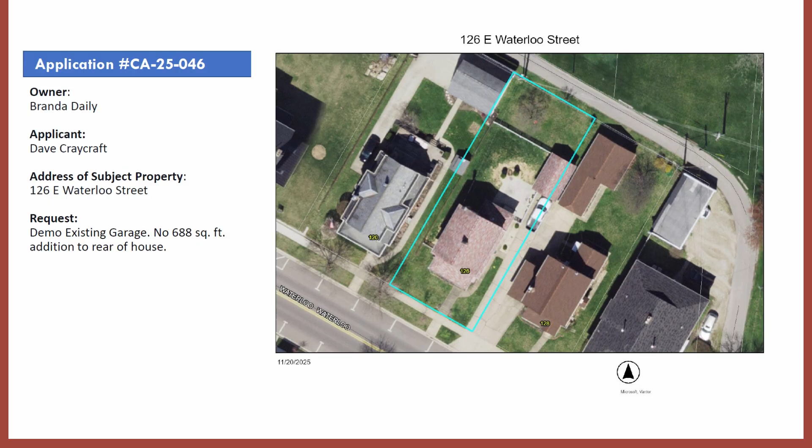What we're probably gonna do is cut like this over to here and replace all of this, and then this will be a pad too. Got it, okay, you can see how it's all broken up. Yeah, and she might decide to replace all the bad concrete drives. Could we see that overview with the concrete pad, please, Andrew?

What's the purpose of that concrete pad there? She just wanted someplace to put her picnic table and other things, like during the summertime, if you want outdoor patio space of sorts.

Is there any plans for any vegetation or buffering of that space from the rear that you know of, Dave? I don't know. I mean, she's talked about trees and things like that, so it will be slightly landscaped.

My only concern from our office was basically from the road all the way back to the last 24 feet of the lot was gonna be just a solid strip of concrete. I wasn't sure how this patio, if it was broken up, there was a gap, but just the way we were thinking about it, worst case scenario is someone could fit like 3 30-foot RVs on this driveway and still have room to park 2 cars, and those are things that we try to avoid.

Well, the new concrete won't extend back to the alley. No, but that's just thinking about how long and straight this is. Someone could just drive through the lawn, get back through the alley, and all of a sudden you have this really long runway. So I wasn't sure how this is broken up to define the patio, not the old driveway.

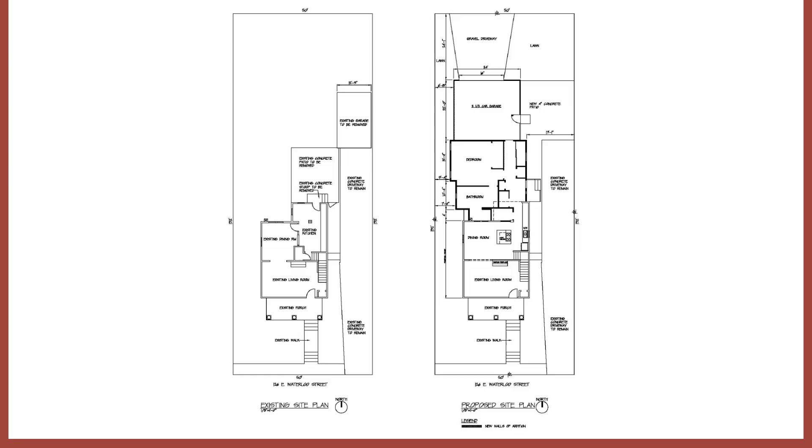But anyway, yeah, I kind of answered that question. Dave, what type of soffit, Hardie soffit details? What about ventilation? Well, the soffit will be vented. Using like a strip vent? No, I think it's just regular, it's got perforations in the Hardie soffit. Okay, yeah, I got you.

Gutters are to match existing. Yeah, the original house, the existing house is K-style. K-style. Yes, okay.

No other questions? I'd like to make a motion that we approve application CA-25-046, omitting the patio from tonight's application for a future application, that the roof is all to be replaced and all match with new dimensional asphalt shingles, and the driveway is not to be gravel but rather a paved material.

And we didn't talk about the siding on this. Are we in agreement that the shakes are the way to go with option B? Shakes are the way to go. Yes. And then also, we're going to add one window to each side, the east and west side of the garage. That the doors are to be fiberglass, two-panel, nine lights, to match the existing, and that the gutters will be K-style gutters to match the existing.

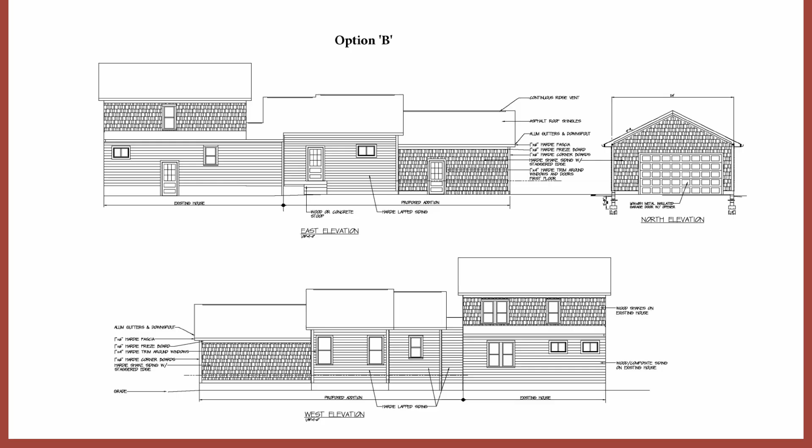The next application for tonight's agenda is CA 25049. This application was also tabled at last month's meeting. This applicant was requesting to demo the existing house to construct a new single-family house on the existing foundation.

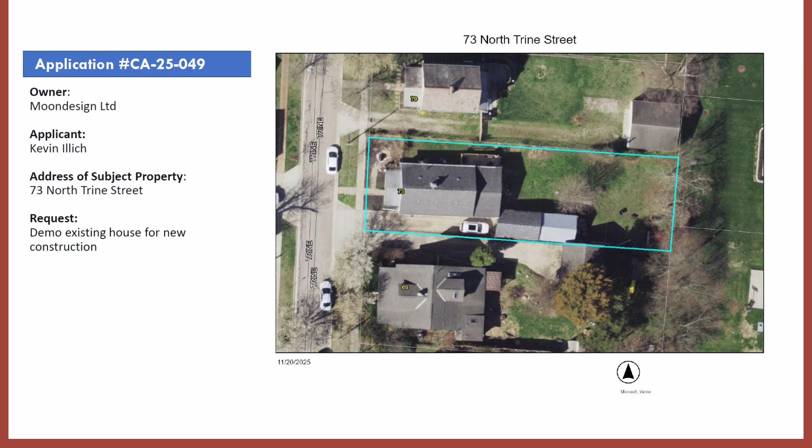Based on last month's landmarks meeting, the commission was invited to go take a look at the house to warrant if additional criteria, as noted in the demolition considerations, was required for the evaluation of demoing the existing home. I believe most, if not all of you, went to tour that house to see if this demolition consideration was deemed necessary.

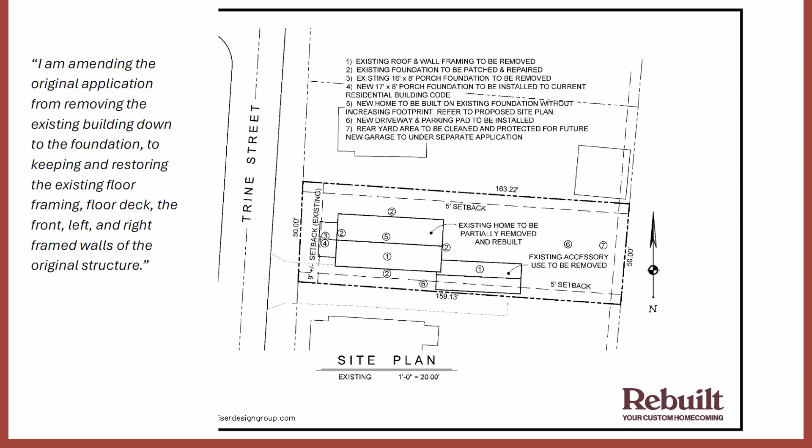The applicant, since your on-site visit, has amended their application to not demo the existing house to the foundation, but rather keep the existing floor framing, floor decking, and the front, left, and right framed walls of the original structure, while removing the rear wall, which is a portion of the addition that was added to the house in 2003, to rebuild with those existing walls and first floor frame deck and existing foundation for the new house that will be on the same footprint of the lot.

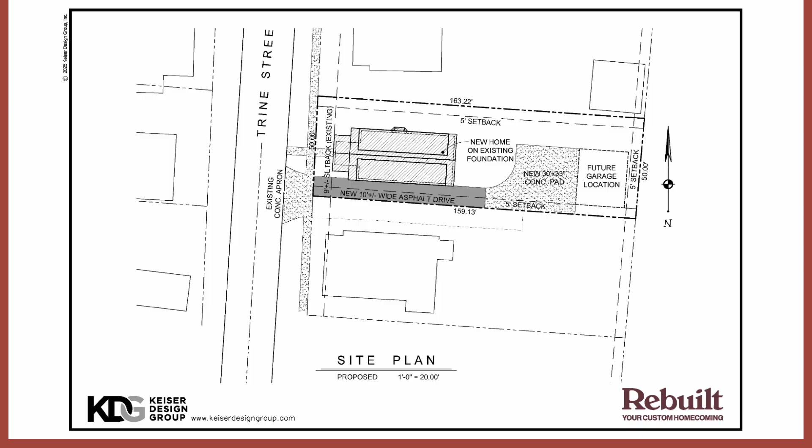So again, based off of last month's discussion, here's the updated site plan showing the new house on the existing foundation. We'll have a future application discussed next about the detached garage to be in the back. The floor plan has not changed since your last review, but when looking at the front elevation here, let's go over some of the changes with the commission.

As presented last month, this front porch patio was going to be historic architectural brick, a true brick with a concrete cap on it. The applicant has modified this item to be a brick veneer attached to a concrete slab for the porch. I believe that was the example that was brought to last month's meeting.

The window trim, the lower section of the windows, the sill has been updated since last month's review. The applicant has also updated the rendering a little bit to show some line work for the standing seam metal roof on the gable ends.

Moving on to the back, no changes other than the lower window trim. To the side, the only change that's notable on the two side elevations is the asphalt shingle has changed brands and type from the last review. And then looking at the south elevation here, again, no changes other than the lower window trim and the notes for the asphalt shingles.

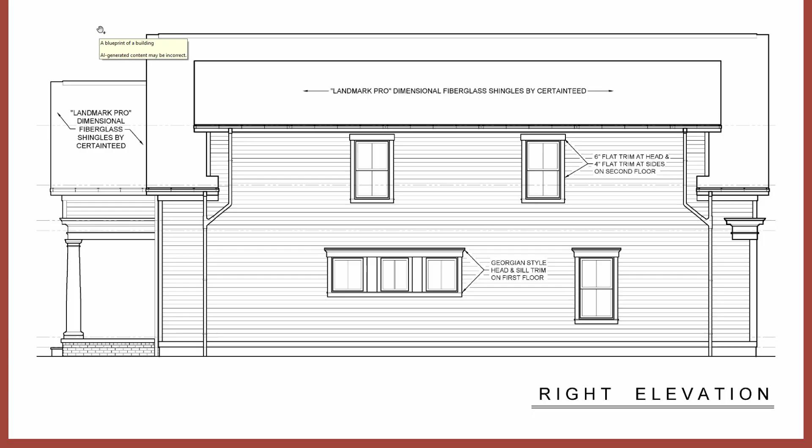I went through and updated the applicant's letter here, just to note that they have committed to doing LP siding, the CertainTeed Landmark Pro fiberglass shingle, and the same Andersen Series 200 windows as noted previously.

The applicant still notes that the columns will be a non-structural fiberglass or composite material. They did bring to last month's meeting different paint samples, light fixtures, and roofing. I know a lot of that stuff we did not really get into during last month's meeting, but I believe

they still have the information this evening to discuss. Applicants here to kind of talk about their updates they've made. I think I would like to give them the opportunity to talk about what they've done since last month's meeting before you guys ask questions.

I think that may be a little more informative since you all had time to visit the property in person, to maybe see why their mindset had changed from a complete demo from the foundation to trying to save some of the first floor. I thought that'd be helpful to go that route rather than asking questions first. So if you could indulge me to let them present, that would be my preference this evening.

First off, just want to thank you all for your patience with me being out of town for the first landmarks meeting. I probably could have helped avoid some of the things that were up in the air, but very much appreciate you guys coming out to the property. I know that many of you got to talk with Chip, who was here for the last meeting, not here for this meeting, but got a better understanding of what maybe our plan is with this.

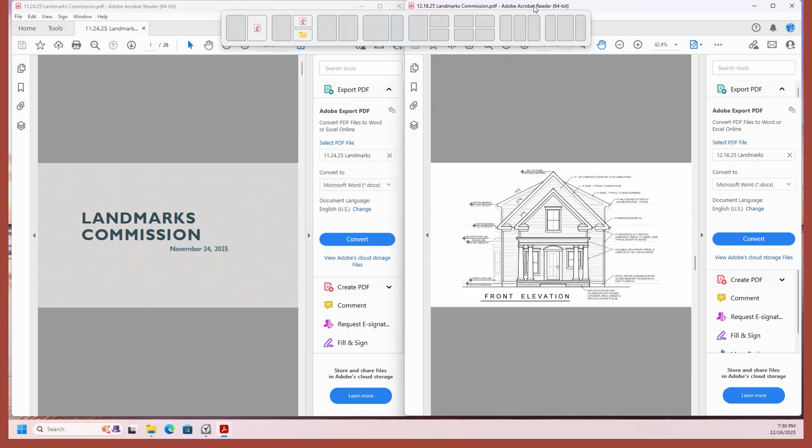Yeah, give me a second. Bear with me, I'm trying to make some magic happen here. Technical difficulties. All right, for a frame of reference, November is going to be on the left. There, that's great, thank you. It's a good side-by-side - that's the old, that's the new.

It's the old and the new. It's subtle, especially on the front, but when you see it also on the sides and the way that the fenestration patterns on both of the sides, it does simplify that.

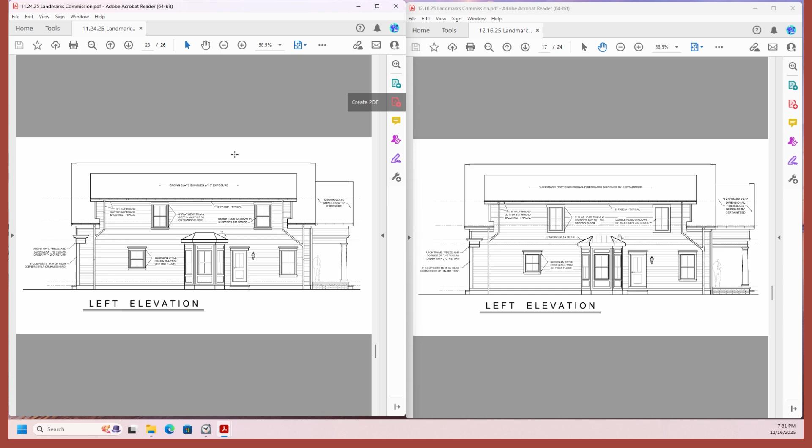Also showed the standing seam. So it is, we did keep the crown, the head, window head crown on the first floor. And that is because we looked at it as flat.

It was one of those situations when you looked at it, you knew something wasn't right, but you couldn't quite put your finger on it. But something wasn't right. So what I did is I took a look at, there's a home here, I think it's on Washington Street, that's kind of like an olive green that has white trim. And it also has a very, like a 4.5-inch or 4-inch horizontal siding with white window trim, like that. So, I think it's my house.

Is it Columbus Street? I think it was. Was this the one that was Kayla Smith's place, the one that was just painted, just redone? Oh, okay, just across the street from us then. Was it a two-story house? Yeah, two-story. It was kind of like right behind us here, it's like a darker green, like an olive color green with white trim.

But yeah, the detail of that I think looks nice, the header on the first floor windows, I think it goes well with what's being done on the porch too. I think it just blends in nicely. And that's kind of why we wanted to keep that, is because the whole porch itself with

the room extended over it kind of sets the tone for the rest of the house. And we just wanted to carry that around. The other thing I wanted to point out that I don't think it made the cut on the last hearing, but

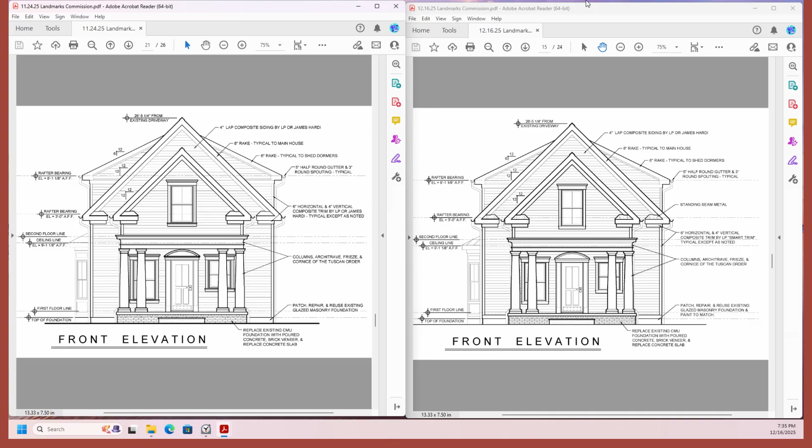And if you look at, in this case, the shed dormers on this, that roof pitch on the shed dormers is on purpose. That's the same pitch on the existing house. And then also, if you look at where the rake ends on the shed dormers, that little detail, Andrew, I don't know, do you have a photo of the one I could pass around?

Yeah, if you can zoom in on that eave. So that's the same, I got more detail pictures.

So we were trying to take some of the parts and pieces and some of the small details on the existing and copy it over to the new. So the roof pitch is mirrored on the shed dormer. The eave detail is mirrored on the dormer.

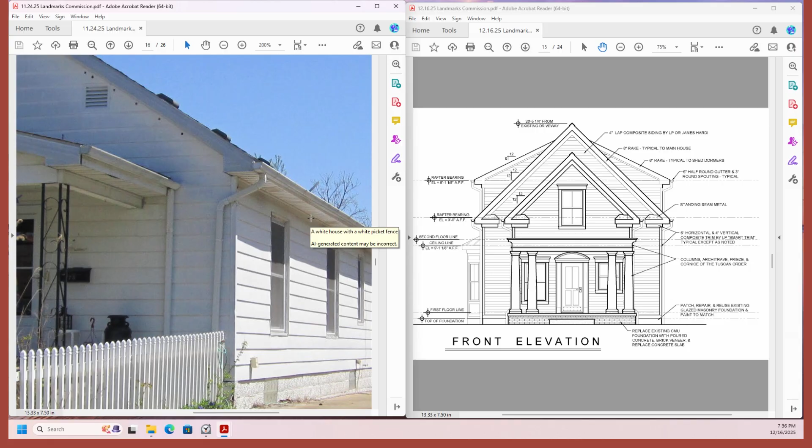And then the location, we want to reuse as much as we can on the inside. So there's more to what we looked at with preservation than just keeping materials, if that makes sense.

We tried to fit a lot of that into the design to repurpose. Yeah, on purpose, it wasn't... repurpose, yes, repurpose.

Peter, you gave a very good statement at the last meeting, talking about how some of these homes have good bones, and why don't we restore them, they should be brought back. There's room on that soapbox for both of us, because I'm there with you. But there is, in this case, a difference between restoration and preservation.

And this is in the preservation district, so I took the design and aimed at it through that lens. It was through that lens that this was put together. But there isn't anything on here that's not intentional. It was somehow tried to be tied into the existing site and the history of that particular land.

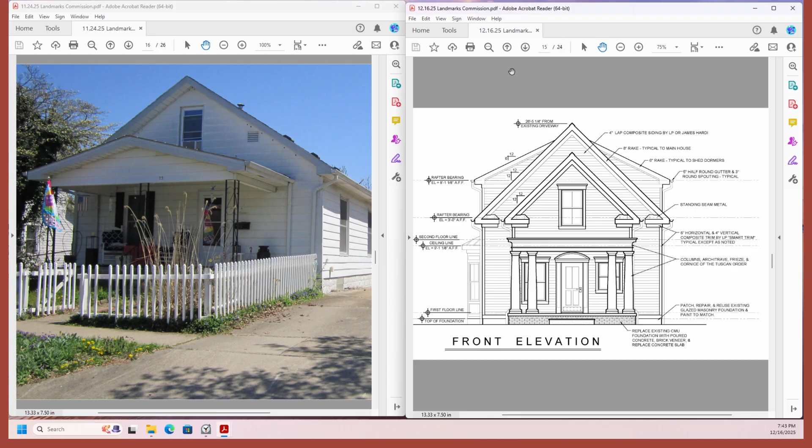One thing I would say on the eave returns, the boxed cornice return - I think you had black metal for those originally. I tend to think those look much more authentic when they're the same color or close to the fascia as the trim, where they're not such a stark contrast. I like the return, I like the detail there, but I'm not sure black is the answer on that particular part.

Aside from that, I think the proportions are nice. It's a massive improvement. We take each property as its own - some of the houses that surround us in this neighborhood have a tremendous amount of architectural character and detail. Some, like this one, in my opinion, I feel like really doesn't - just doesn't have a whole lot to offer.

It didn't from the beginning. Of course some of that's probably been covered up and it's hard to say what was there, but it's nothing like what you've created here. I think there's some room for improvement in these neighborhoods, again on an individual basis - this one doesn't bother me too much.

Now with that said, I don't know how much you all looked around. The one thing that scares me about this project - for you, and you do what you want with it - but that basement is scary to me. As a builder, I know what kind of investment you're going to have in this and how tight that may or may not be in the end. My concern is just sticking with that foundation - have you hopefully had several engineers in there to look at that and make a really solid plan.

Because I just feel like if I went in to buy this house, knowing what's going to go into it and the price tag you're likely going to have on it - which I'm also excited about - but I know how that goes, and from a buyer's perspective, I'd be looking at that foundation and saying, man, this is a brand new house on a 1922 problem. So that's for y'all to figure out. I just felt like I wouldn't be doing my due diligence if I didn't throw that perspective in.

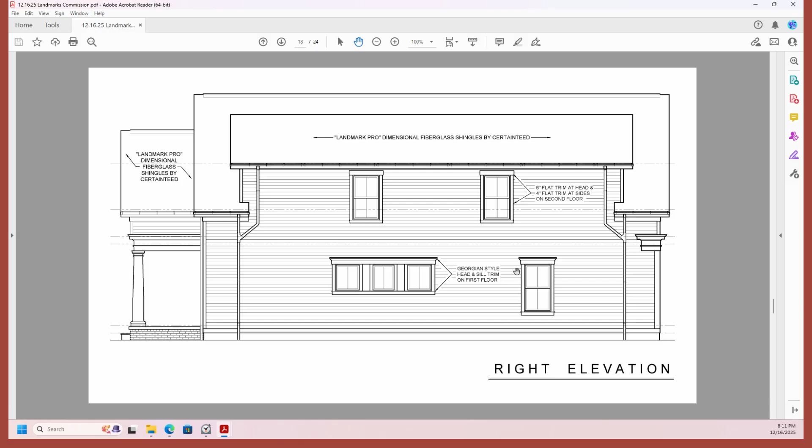Pete, you're talking about this window in the back? No, this is the window front, just this front room. Those three windows here, and this one gets a little longer. Correct.

One thing I'd ask you guys to consider from my perspective, there's limited natural light in this home. We had originally wanted to do a little bit more on the front side, which is the living room inside. The bay windows I thought were a good addition. You can see I was trying to do some additional shorter windows over the right side of the kitchen, that short cabinet wall.

I love the idea of the stairs there. The issue is it takes up one of the current existing large windows that brings natural light to this space. This one. Yes.

The south facing side there too. Yeah, exactly, the west side of the home right there, east side of the home, right? Where's the sunset, east or west? It sets in the west. Yeah, and that sunset's right in that front, it goes through those posts and right through that door, right through the front door.

I do understand that proportioning. I struggle with losing any space from windows that we can't keep larger, but I do understand. I would almost rather come up with a solution with the staircase on the right to make that window match the size of the one on the left, rather than shrinking the other first floor front windows.

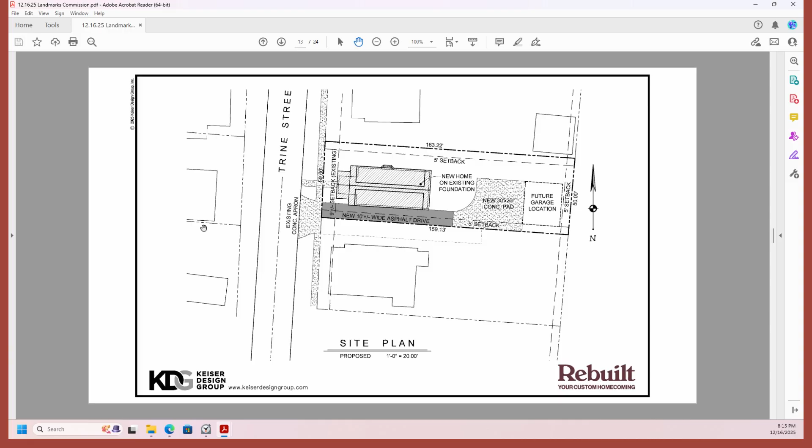And there's lots of... it's a jungle back here right now, but there's a bit of lawn back there. Yeah, we have lots of thoughts. There's a couple of hurdles, but nothing we can't work through with the area or the units outside.

Roughly, there's also an old storm door out there that is more towards the west of the property. I like the thought that went into the little swinging gate between the garage and the house. Somebody thought really hard about that. It's one of the things that's held up.

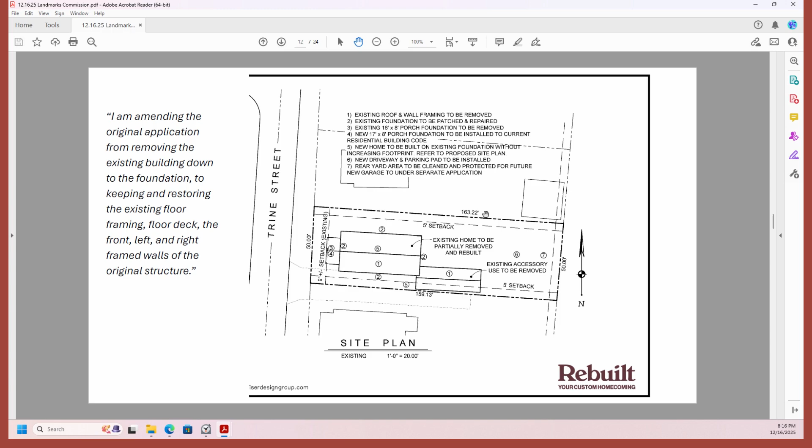So I can comfortably cut one riser on the stairs, just take it out and not have to move it to the front. But we also have room, if we needed to, at the top of the stairs. I just have to be careful because we have the basement stairs, the access to the basement there as well.

Does that go down right there? Yeah, backside. It's a lot. Right there from the kitchen. We'll be fine.

Will the cellar door be going away with this? You said there's a cellar door, that exterior door outside? That's what I'd say, ideally it would go away.

And obviously anything that would need approval we would address, but we had some thoughts about doing some sort of pergola on that side. We just don't know yet. Right now, the plan for that basement is to house mechanicals. They're not intending to use it for additional living space, it's where you store your Christmas lights when you're not using them. It's utilitarian rather than a space to be finished and used as habitable.

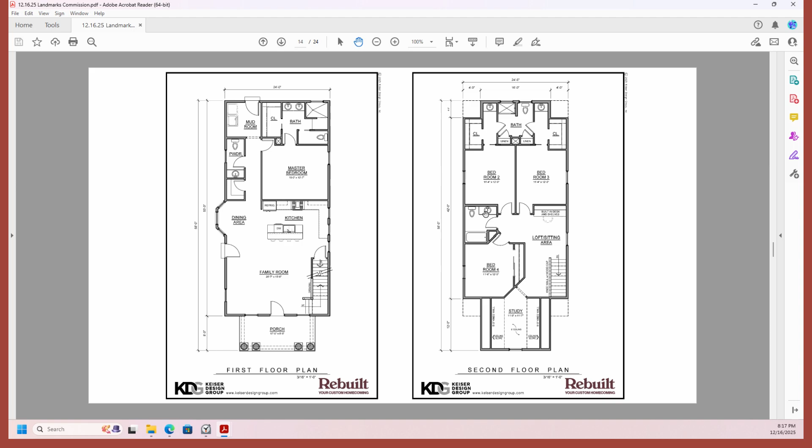So you can get rid of the coal chute? No, we're keeping that.

I have a couple questions just on the application to clarify. It says the new siding will be 4-inch fiber cement. Are we still planning on smart side siding, because that's different? Yeah, it'd be LP. So the application says 4-inch fiber cement, but we're looking at the LP smart trim.

It says asphalt shingles, and then it says dimensional fiberglass shingles. Is that just a typo? Yeah, that's a typo. Originally we were looking at an asphalt shingle that's a slate line—looks kind of like slate, but it's asphalt. But looking at sourcing and visibility, it's up high enough that it's not going to be visible, so we were looking at just using an architectural dimensional shingle.

Still in the dark, black, charcoal gray, slate colors. And we're spending all the money on the gutters, so.

What are those gutters? 5-inch half round with half clips, 3-inch round downpipes. In what color, do we have that? Galvanized bronze. Then all downspouts are all round, obviously. Yeah.

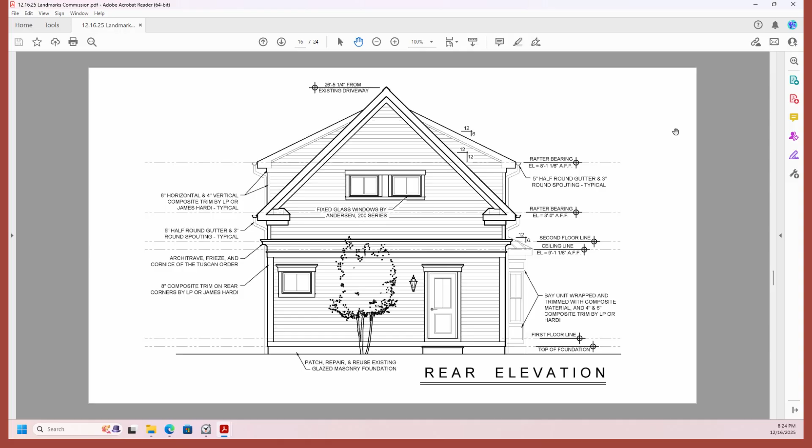What about the exterior? It'd be the same on both sides, a single raised panel with a two light simulated divided light. The front door has two panels, while the side and rear doors have a single panel. Is that front door also a glass light? It is, so two vertical panels as opposed to the single panel on the sides.

And your stool on the windows, you said that's a 3/4 stool? 3/4 inches thick, it's just going to protrude about the same. Thought about making that a little thicker, out of like a 5/4 piece, just to beef it up a little bit more, a substantial little bit.

I think it'd be more appropriate with the width of the casing and the head. So you've got a stool, a simple apron, two casing legs, and your head will be thicker than the casing so it'll have a little bit of a reveal and a shadow across that. And a crown detail and a cap?

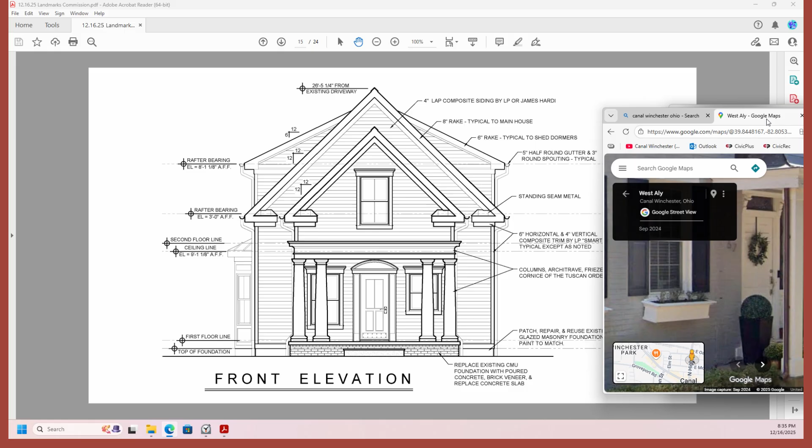This is, just for frame of reference, an actual copper gutter, and that's a copper roof that patina'd in town. Is that Woodrow's house? Yeah. Is that a real copper gutter? That's a real copper gutter. Wow, it turned to that, huh? That's surprising. Yeah, and that's the copper roof - it stayed shiny copper penny color for about 8 months and then started turning green, and turned this color about 2 years later.

For real copper to really get that green patina, you're looking at 10 years or so, or a dozen maybe. I remember when that was copper - it didn't last long, it didn't stay copper long.

As far as your trim goes, we were talking, had a discussion on the smart trim. I like the siding product - I've had a lot of issues on projects I've been a part of where the trim has failed. Just don't know if you guys had any discussions about trying a James Hardie or a TruExterior as opposed to smart trim. I do like the siding part of it, the 4-inch siding - I feel like their siding holds up a lot better. What have you had better success with?

I'm a big TruExterior fan. It's a little bit pricey, but it's just a fantastic product and it mills easy - it looks just like old wood. You want to use a smooth side, and this has a rough side on it as well. I have to run, but I mean it looks similar - the smart trim and James Hardie, I think, look almost identical.

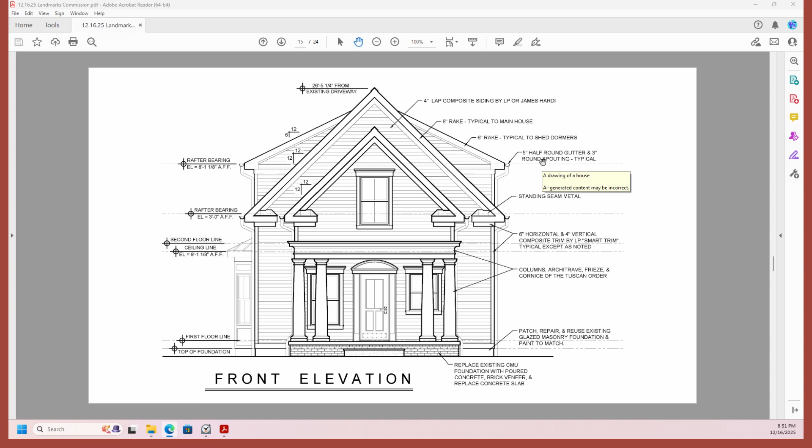And then, just to keep everything consistent, when you have your updated renderings, let's do that as new and old business next meeting, not reopen the application unless it's necessary during the old and new business section. That way only one of you needs to be here to go over it, and it should be a pretty quick update. Sounds good. Sure, very good.

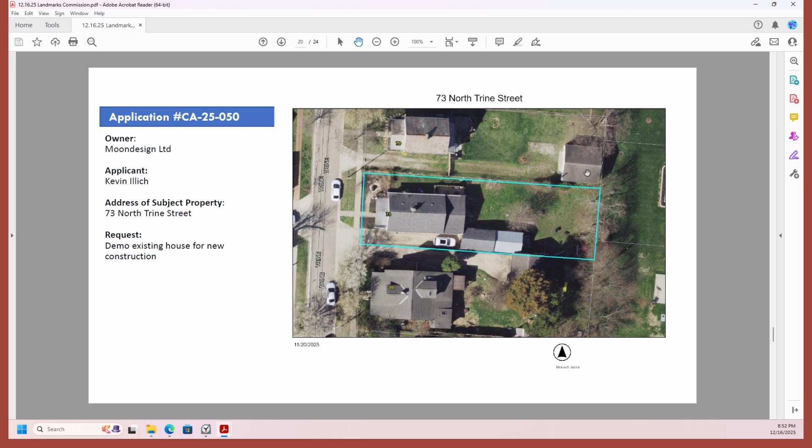The next application for the same subject property, CA 25050 — I apologize, my template here is wrong — is to construct a new detached garage on the subject property. The garage component is a zoning requirement for this subject property.

The majority of the Old Town area exists in an overlay that has an exemption for meeting any parking requirements. This property is on the wrong side of the street of that overlay, so there is a parking requirement to be met. Our normal residential parking standards require one garage space at minimum for any residential house over 1,100 square feet in size. Since this house exceeds 1,100 square feet, a garage is required.

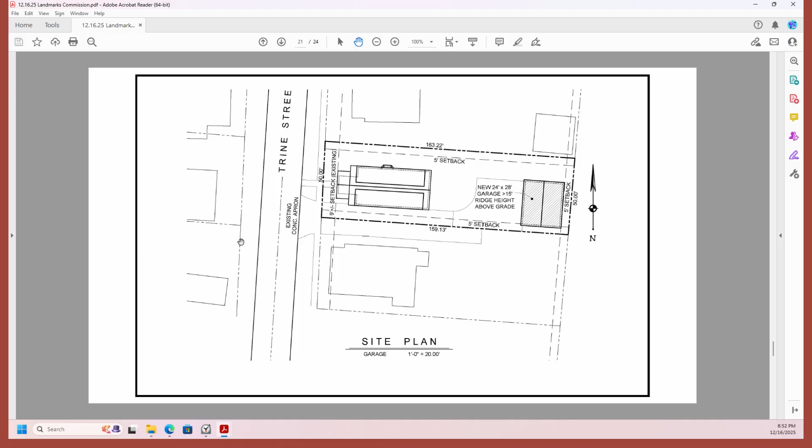So the applicant this evening is proposing that garage component for the back. This request comes with two alternatives for the Landmarks Commission's review. The first is for a one-story, two-and-a-half car garage. This meets all zoning requirements for the garage and is also within the threshold for maximum size and height for a detached building.

The applicant is also requesting a second alternative to be reviewed, option B. Option B would be adding a half-story to the upper part of the garage for a bonus room.

This garage height does require a variance from the Planning and Zoning Commission, but in order for the applicant to get processed on their building permits tomorrow at 5 o'clock, whenever they can have those ready, at a minimum option A needs to be approved by the Landmarks Commission. Option B, if the Landmarks Commission does approve that as a path to move forward for a taller building, that would be on Planning and Zoning's agenda potentially for January or February, depending on when the applicants file.

So this request is kind of in two parts: one, to see if the Landmarks Commission is okay with a taller building, but also to keep the building permit process moving for them, since they have to have a garage in their submittal to my office. That's why there are two options here this evening for you all, just in case either you or the Planning and Zoning Commission does not approve the taller building — they can still start the project on the house.

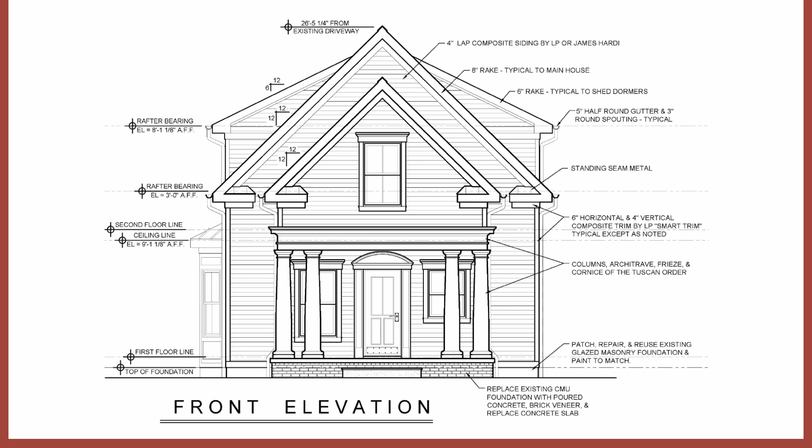What's the height of the garage versus the height of the house? The garage is shown at 21.9. The house, with the adjustments being made, would be at 26.3, or 26.2.

So one of the items that staff had to work with the applicant on extensively with this garage proposal was to keep the garage height under 22 feet. 22 feet is the higher end of the average of what the Landmarks Commission has recommended to Planning and Zoning and what the Planning and Zoning Commission has approved. So to keep things consistent with other garage variance requests, this was one item the applicant has worked on.

The garage did start out at 26 feet, the same height as the house, so keeping the scale down to be smaller than the main residential structure was an item we worked through internally.

How does this garage compare in height to some of the other ones, like I see on Columbus Street? About the same? The ones right behind our building here are taller than this, but those are all also historic buildings. Yes, with the exception of one of them that was approved in the 90s, I believe.

Since I've been with the city the last 10 years, the tallest detached garage building that the Planning and Zoning Commission has approved was just over 22 feet tall. Hannah's? No. Hannah's is at 19 - the garage door is like flush with the ceiling when you open it. That is low, yeah, it's really low on the first floor.

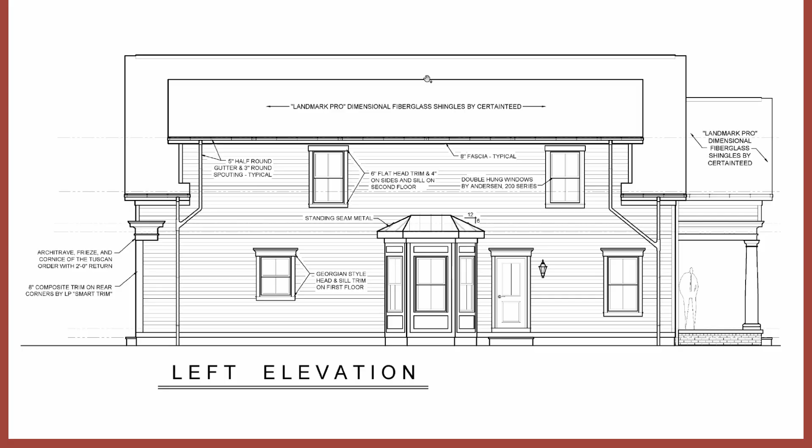The 6-inch trim, I apologize, is for the top of the windows. Just over the top of the window edge. The house itself was 6-inch - basically we're copying the same details on the house. Okay, that was my question.

Same window trim - so would the window trim mimic the second floor, kind of dumbed down a little bit? Yeah, it would, even on the first floor. So if you look at this as well - right, so the first and second floor of the garage will match the second floor detail of the house. Yeah, and the only difference in detail on the garage versus the house would be the shutters and the door.

Why'd you choose to use shutters on it? Because it's a garage, so it's a throwback to the old carriage house - make it look a little more period-esque, period time. But in 1922 they still rode horses, you know, and a lot of these garages, or garages that you have today, were originally old carriage houses.

I was gonna ask that same question - why are you putting shutters on the garage but not the house? What is the detail on the shutter, is that like a raised panel? It is. Any thought to just a standard louvered shutter? Other than the louvered shutter wasn't accurate to the period, so we just try to do it architecturally or historically accurate.

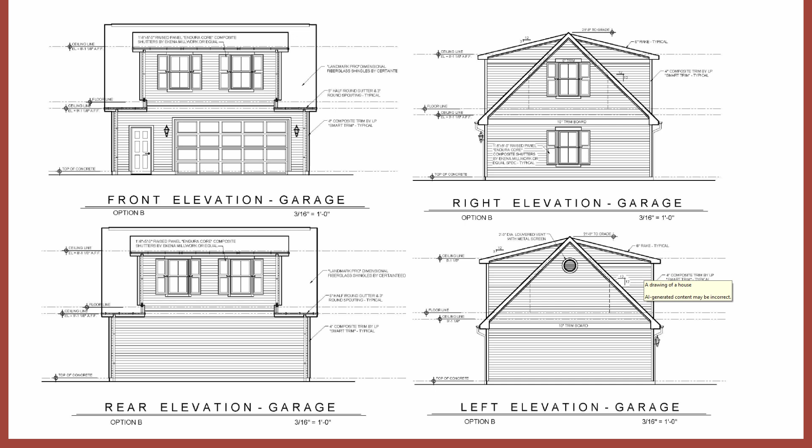I guess it's a no on the window there. And that faces north, correct? Let's see, yes. Yes, this is left, correct. It faces the neighbor's garage. This faces south. If your door is here, then your stairs are on that side, so your stairs would be going up on this end. Right. Yeah, so that gable, the windowless gable, faces the neighbor's garage.

Do you have to fire rate this building? We don't - 5 feet away from the property line? No, it says 10 feet from another structure is the fire rating. Okay.

Does this application approve the demo of the two garages? The prior application is that one, second? Yeah, that's part of that, okay. Do we have any further questions?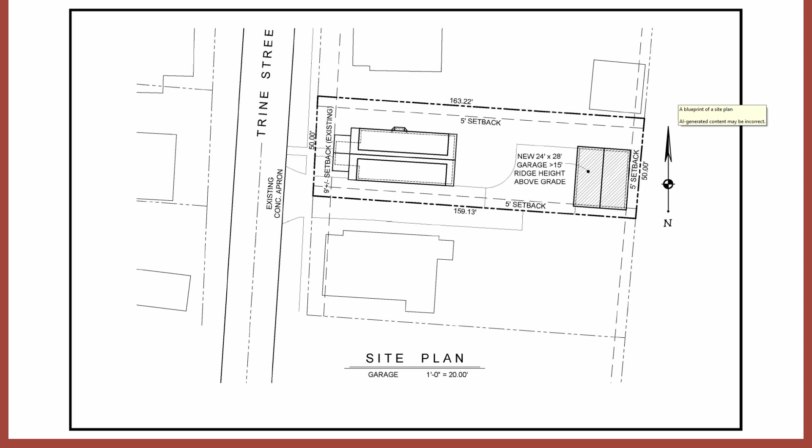I do not. I would like to make a motion to approve application CA-25-050, approving both option A and option B for the variance for planning and zoning, with the conditions that the siding is to match the house in a 4-inch smart side with 4-inch fiber cement or composite casing, 6-inch heads. The roof is also to match the house as a Landmark Pro dimensional asphalt shingle. Windows are also to match the house, with the more simple second story detail on the house to be the same for the whole garage. The door, man door, will match the house and be a Stanley door.

6-panel gutters also to match the house in dark bronze. Garage door as presented, and the shutters also as presented, with one change to the round vent as a rectangular vent that is non-operable. Anything I missed? I'll second. Thank you, Dave.

So, I apologize: number 1, option A and B approved. Number 2, variance recommendation to P and Z. Number 3, siding is a 4-inch smart side with a 4-inch fiber cement or composite trim. Number 4, windows and roof match the house. Number 5, man door is a solid 6-panel Stanley door. Number 6 is gutters match the house. What was 7 and 8? Garage door as presented, and changing the circular non-operable vent to a rectangular vent.

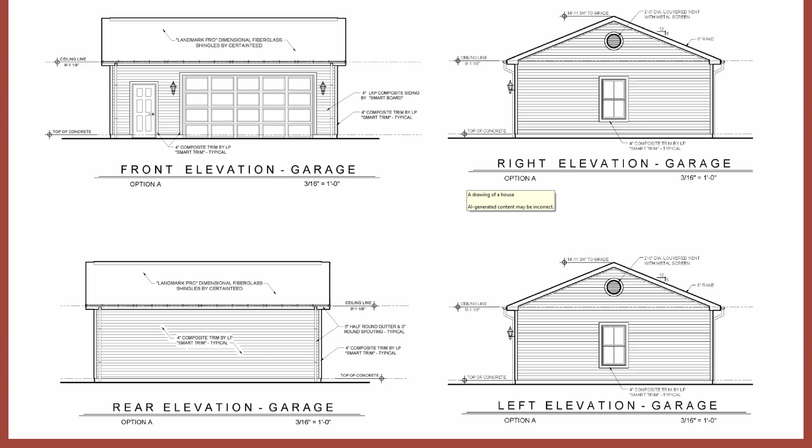Thank you, guys. Thank you. Good luck. Exciting project. Appreciate your help, got your work cut out for you on that one. Very fun. Mind if I stop by every once in a while? We still gotta do it all. That's right, we might charge admission. Bring my hard hat. It'll be a nice improvement on that street.

For old new business, I just want to thank you guys for another great year. 50 applications - my guess at the beginning of this year was 60, so we were a little off. We slowed down towards the end of the year, but at the beginning, I think we were at like 20-some applications 3 months in, so you guys had a very consistent year. Lots of really good applications this year. I think Kevin's gonna bring a couple more next year for you guys to look at, so hopefully you didn't wear them out tonight.

Real quickly, Kevin, before you take off, the submittal deadline for the variance is this upcoming Monday by 4 o'clock. So call me tomorrow so we can go over the application, because I know we haven't even looked at that together yet. But thank you guys for this year.

Linda wanted me to tell you guys thank you so much for her time here. She had a blast. She wants to focus on the Historical Society, so she's stepping down from this and some other commitments she has. But she's doing a lot of volunteer work through them, trying to update their records and do some historical inventory on people of interest in Canal and their history, so that's eating up a lot of her time.